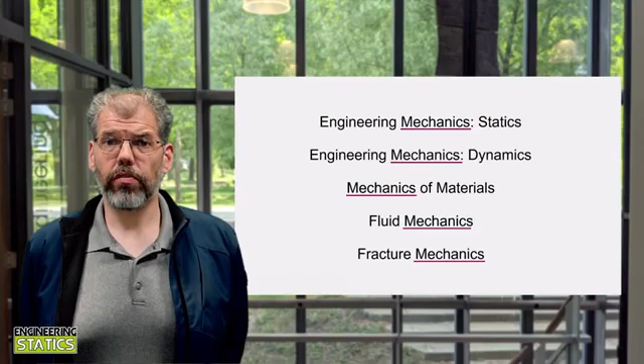When you start an engineering degree, you are faced with many challenges and questions, and today we are going to try and answer one of them. That is, what is engineering mechanics? You may have noticed this word mechanics seems to show up a lot in many of the courses you have to take, from early courses on statics and dynamics to later courses on fluid mechanics and fracture mechanics. What is meant by this term, mechanics?

Let's start with what it is not. Don't confuse the word mechanics in engineering with the profession of a mechanic. Although in engineering you will learn the wonders of WD-40 and duct tape for fixing things, this is not the core of what mechanics means in an engineering sense. For engineers, mechanics describes the behavior of bodies in terms of a state of rest or motion when subjected to forces. There are three key words in this definition: bodies, motion, and forces. What do we mean by these terms?

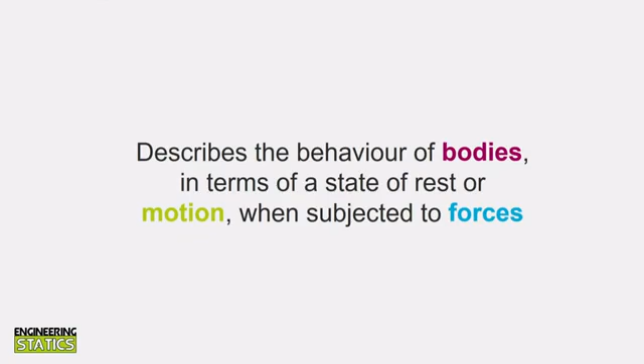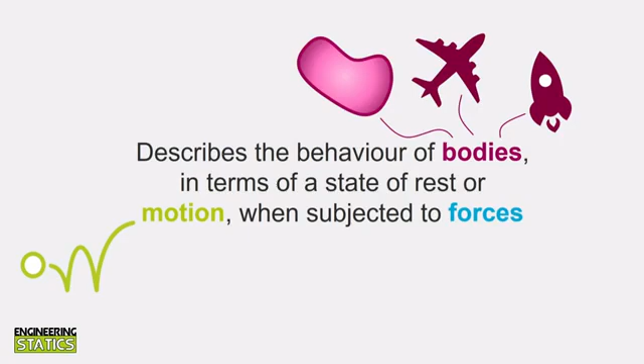The term bodies refers to any physical object, such as an aircraft or a rocket, but could really be anything, even a potato. In lots of mechanics textbooks, you will see generalized bodies drawn as potato-shaped blobs like this. We will often use such a representation of a body when introducing new concepts in this course, and you will often hear me refer to it as an engineering potato. Motion is a more obvious term. It refers to how a body moves, including both translation and rotation, as well as speed and acceleration.

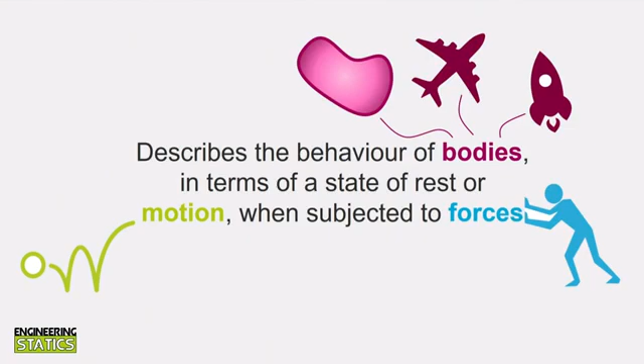This leaves us with forces. Forces can be defined as interactions that will change the motion of a body if they are unopposed. How can we think about that in practical terms? If we want to move an object, we can either push it or pull it. So we can think of forces as a necessary push or pull to cause motion.

Lucky for us, a really smart physicist by the name of Isaac Newton came up with some handy laws to describe the interrelationship between forces, bodies, and their motion. As smart people tend to get their name attached to smart things they do, these laws are aptly referred to as Newton's three laws of motion. So let's briefly review these laws.

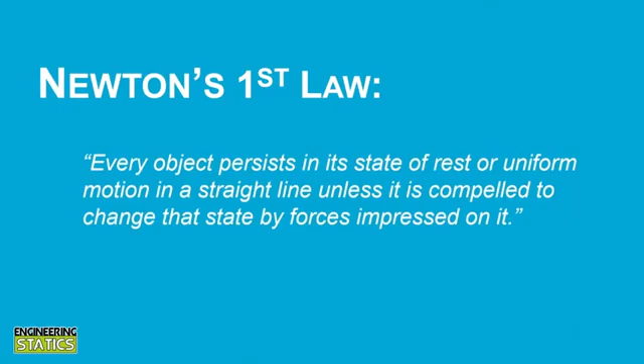Newton's first law states that every object persists in a state of rest or uniform motion in a straight line unless it is compelled to change that state by forces impressed upon it. In other words, bodies are inherently lazy and do not want to change their state of motion. You require a force to push or pull that body from rest, or to change the speed or direction of its motion.

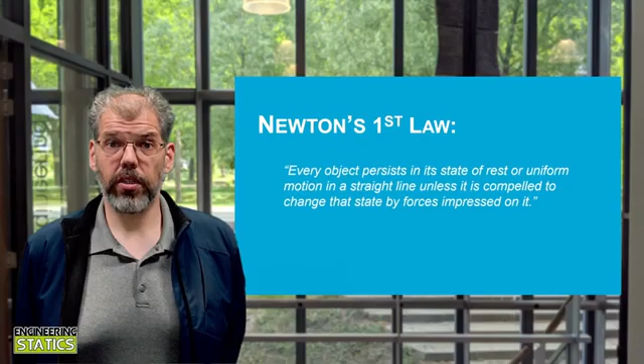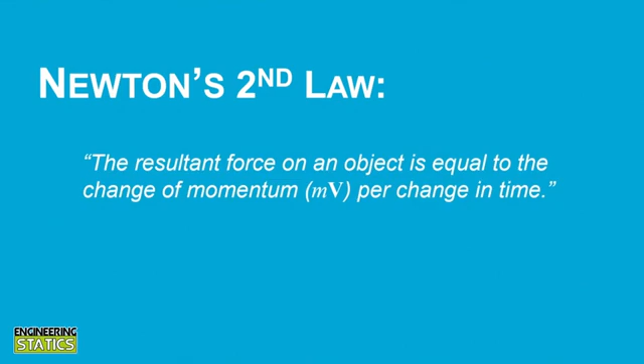Newton's second law states that the resultant force on an object is equal to the change in momentum per change in time. This can be written as F is equal to the time derivative of the mass times velocity. Now you're probably thinking to yourself, wait a second, that wasn't what I was taught in high school. We were taught that force is equal to mass times acceleration. So did your high school teacher lie to you?

Well, yes and no. Force is equal to mass times acceleration is a special case of Newton's second law. If the mass is constant, it can come outside of the derivative, and the time derivative of velocity is simply acceleration. So yes, force does equal mass times acceleration as long as the mass can be considered constant. This is most of the time valid as an assumption, at least over a small time increment.

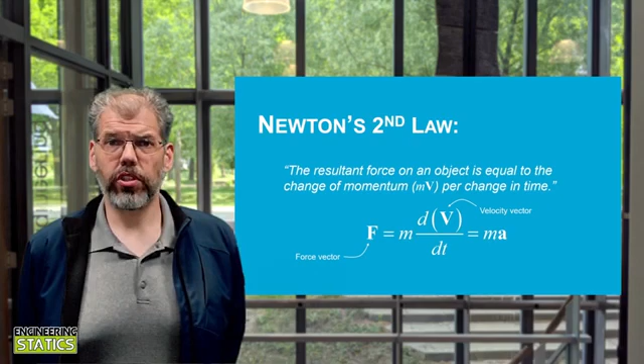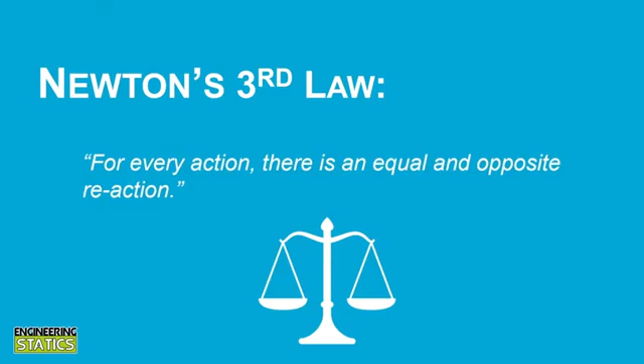Newton's third law states that for every action, there is an equal and opposite reaction. There is a balance to forces, and a lot of engineering is about analyzing that balance, as you will see throughout your studies. Only three laws governing motion, eh? Sounds pretty easy. Or is it?

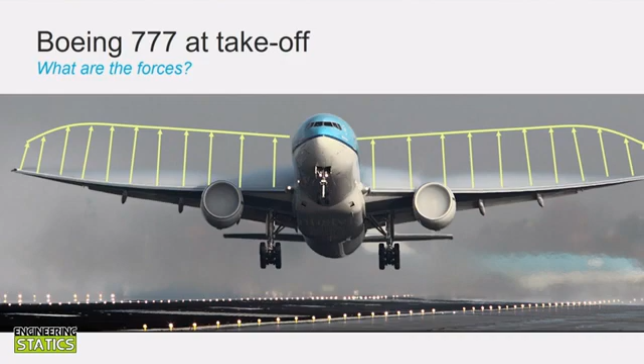Let's try to apply these laws to analyze the takeoff of a commercial jet. Let's start with Newton's second law, force equals mass times acceleration. What are the forces involved in an aircraft at takeoff? During takeoff, there are a number of forces acting on the aircraft. There is the distributed lift force acting on the wings that varies both in the span-wise direction of the wing and in the chord-wise direction as well.

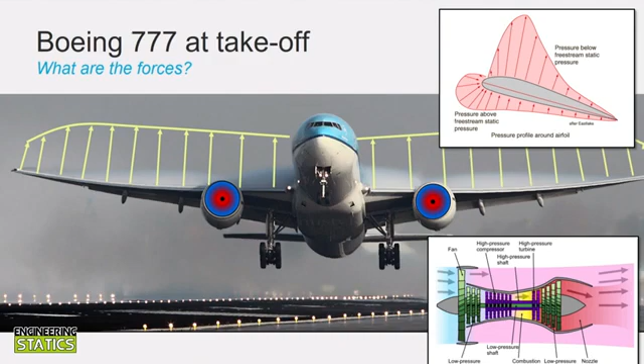There is the thrust of the engines, which also produces a complex distributed load due to the mixing of cold thrust from the fan and hot thrust from the engine core. We then have substantial drag produced by the landing gear and by the entire surface area of the aircraft.

Flight control surfaces such as ailerons can also impart forces on the aircraft, and we shouldn't forget to take into account potential loads due to wind gusts. But that is only one side of the equation. We also have to think about the accelerations.

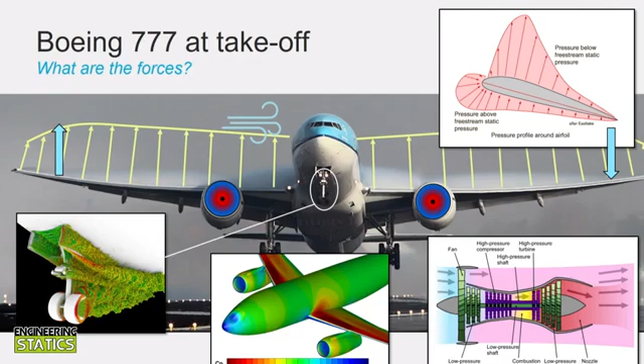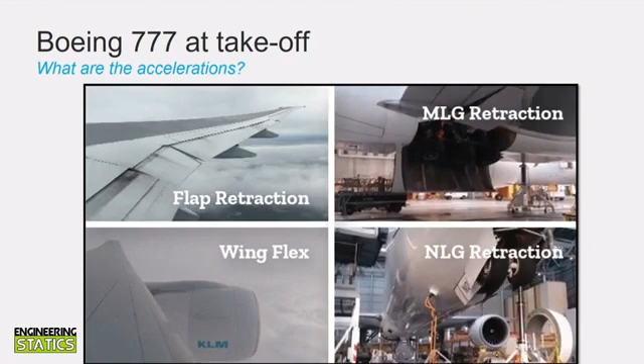In addition to the overall acceleration of the aircraft, there are local accelerations occurring as well. The wings flex, causing different accelerations along the wing, and the flaps and landing gear will begin to retract to reduce drag. As these states of motion continuously change, all of the forces we previously mentioned will also be changing, making the state of motion quite complex to analyze.

So the only way to practically do this would be with a tremendous amount of computational and engineering manpower, just to get one answer, the takeoff conditions. Additionally, in design situations where you're trying to develop a new aircraft concept, the constraints around these calculations will constantly be changing, requiring calculations to start from scratch, time and time again. So what can we do about this?

Well, as you will learn throughout your engineering career, engineering is about making models, and models are basically simplified representations of what we are really interested in understanding. So for a lot of engineering analyses, we simplify the problem greatly so that we can produce quick calculations that can be used to make early design decisions.

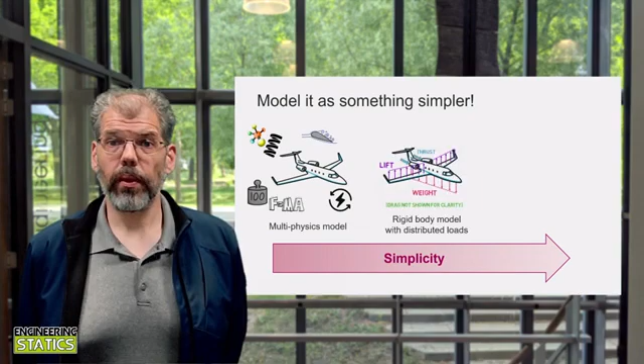For instance, we can take all the complicated physics and aerodynamics of an aircraft and approximate them as simple distributed loads. Alternatively, we can simplify further by reducing the aircraft to a single point mass, with all the complex loads represented as resultant forces. Now you may ask yourself, don't we risk being wrong in our calculations by oversimplifying? Can such simple models really be useful in the context of something so complicated?

This is where I need to tell you a big secret about engineers. Engineers are not concerned about being right. In fact, I would argue that engineers are never right. But that's okay, because engineering is not about being right, but being right enough. We will make assumptions and simplifications that make our results ultimately wrong, but right enough to be useful in our design process. But there is a caveat to this.

Ultimately, people's lives depend on our engineering designs functioning properly. So it is very important to know the limitations of our engineering models and the consequence of these on our designs. This is why it is so important to focus on conceptual understanding throughout your engineering studies. It is critical for you to understand the concepts behind different analysis techniques and engineering models so that you can properly assess if they are right enough for your application.

This is also why you may find your professor paying a lot of attention to whether or not your answer makes sense in the context of the problem at hand. We need to be critical of the results we obtain and not simply follow steps and procedures. But we'll talk more about this in a later video.

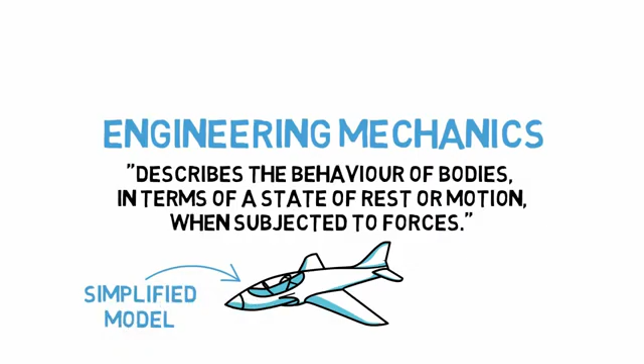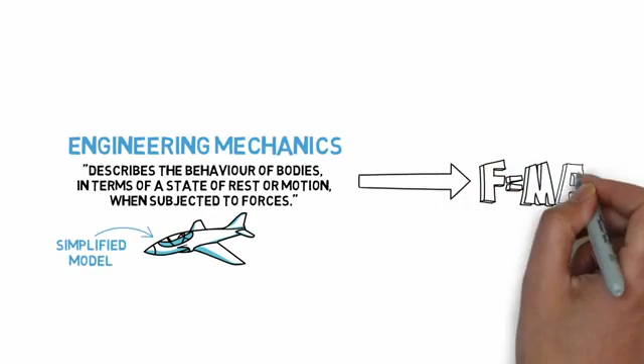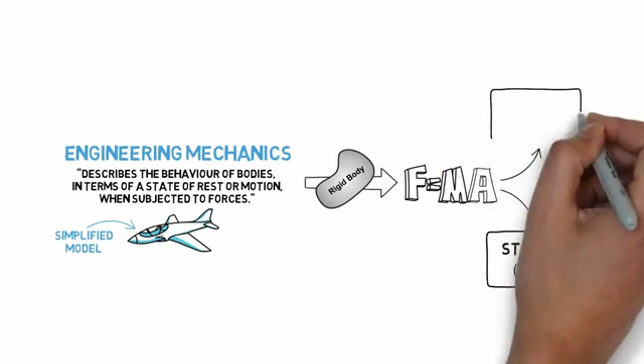We have covered that engineering mechanics is the field that describes the motion of bodies when subjected to forces, and that engineers use simplified models to describe this behavior. Then why are there so many different courses on mechanics? Essentially, we start at the simplest case and slowly introduce more and more complexity into our models. At first, we'll start by modeling bodies as rigid objects, examining Newton's laws of motion for when the body is not accelerating, a course we call statics, and then when the body is accelerating, a course we call dynamics.

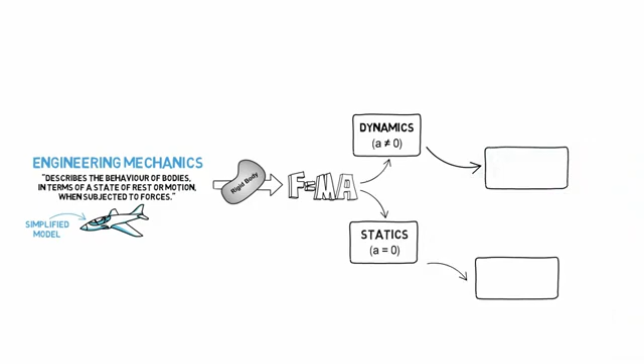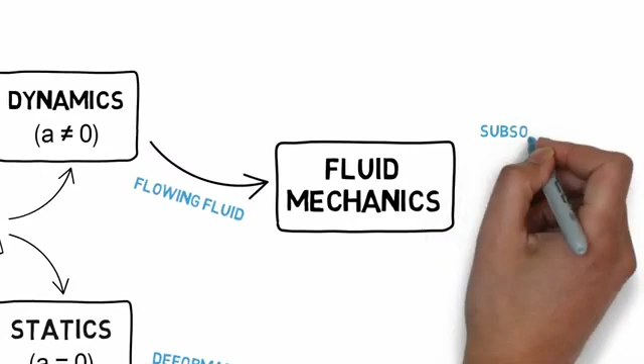However, as you will learn, it is not always appropriate to model bodies as rigid objects. Sometimes we have to consider how the material within the body behaves. We introduce the deformation behavior of solid materials in the course Solid Mechanics, sometimes also referred to as Mechanics of Materials. Fluids also behave differently than solids, so we examine appropriate methods to model fluid motion in the course Fluid Mechanics. Even this course can be further subdivided to recognize the differences in behavior of fluid flow that is subsonic, transonic, and supersonic in nature.

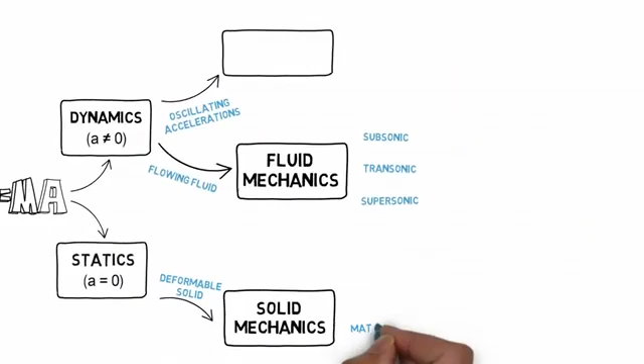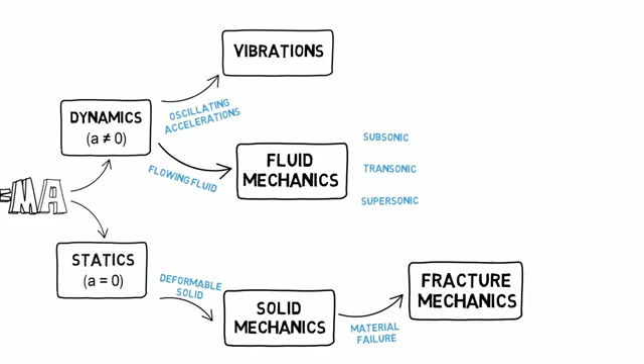Then there are aspects such as oscillatory motion and material failure that can also further complicate our engineering models, leading to courses in vibrations and fracture mechanics. And this is a highly simplified view of these topics you'll be examining in the context of engineering mechanics. In order to describe the forces involved in our models, we have to examine concepts of energy and energy transfer in the field of thermodynamics. That thrust in an aircraft engine doesn't just appear out of thin air.

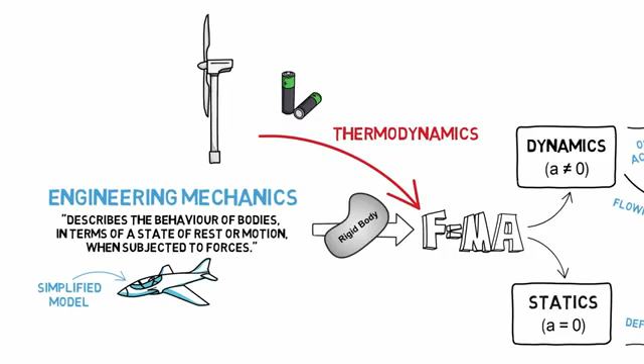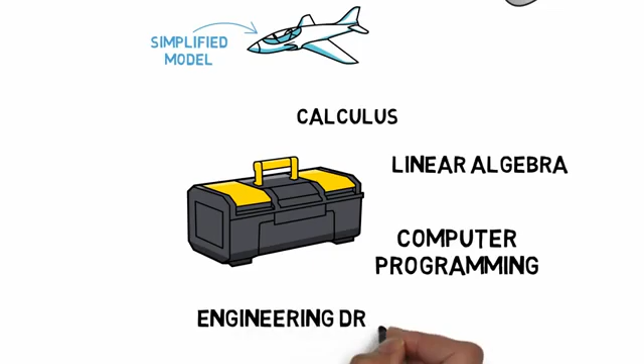And in parallel to all of this, we need to equip you with many additional tools to perform your analyses. Different fields of mathematics, programming skills, and even drawing skills become necessary tools in this engineering toolbox. Wow! As you can see, it takes a lot of effort to be wrong like an engineer, but also right enough like an engineer.